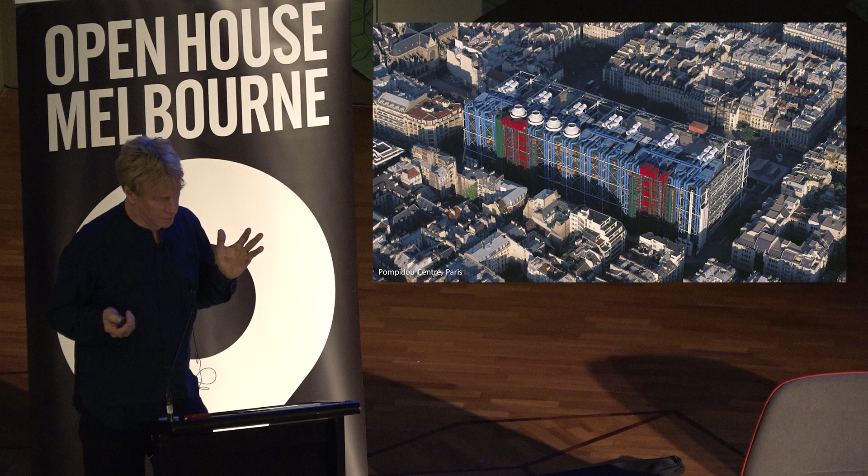This is the founding project of the practice, done in concert with Renzo Piano. I think this building really epitomizes what our practice has been about ever since it was built. It's before my time, so I'm not that old, but it's still as radical today as it was when it was conceived, now 50 years ago.

Richard described it as a place for all people. There was a competition with 600 entries, and it was the only one that gave over half of the city block to a public place, a square. It envisaged really a non-monument, with culture, arts, and a library sort of at its heart - a big flexible container for anything that goes.

The open-ended structure you see here is a scaffolding for the citizen. The piazza is not just horizontal, it's vertical. It's a place both for the formal and informal.

And I think the ad hoc nature of what it is encourages around it an almost showground for the citizens of Paris. It really was a city-defining project in a city that was already very well defined.

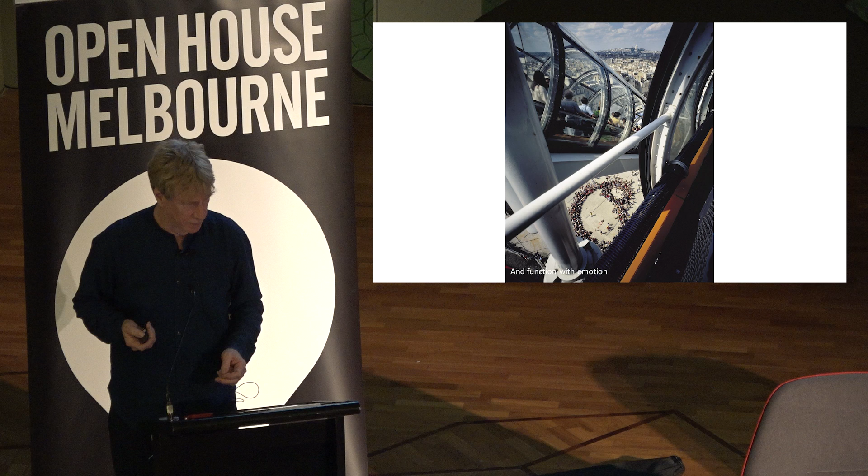The next founding project relates to the city. This was done when I was a young architect, just started at the office. It's called London as It Could Be, a provocative proposal exhibited at the Royal Academy in 1986. This was the foundation of the practice's work on cities, which Richard then took into government, and has been very influential, particularly the concept of a city building upon itself, using brownfield land as the place to build rather than spreading.

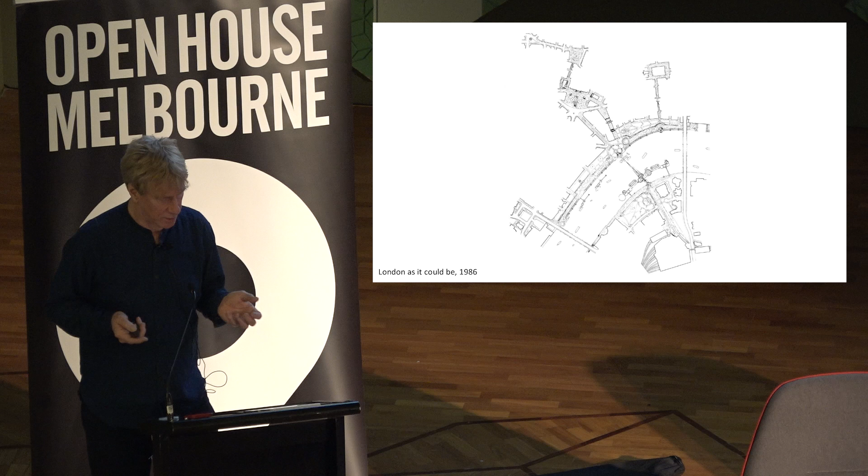It called for the removal of a rail line, which literally crossed from the south, and still does today, landing on the north at Charing Cross. But in doing that, it blights the neighbourhood to the south. So it was really about balancing the city and bringing more equality to it.

It's not a beauty, and I think the idea was to bring back some of that spirit of movement through the city as previously, to really allow people to re-engage with their river.

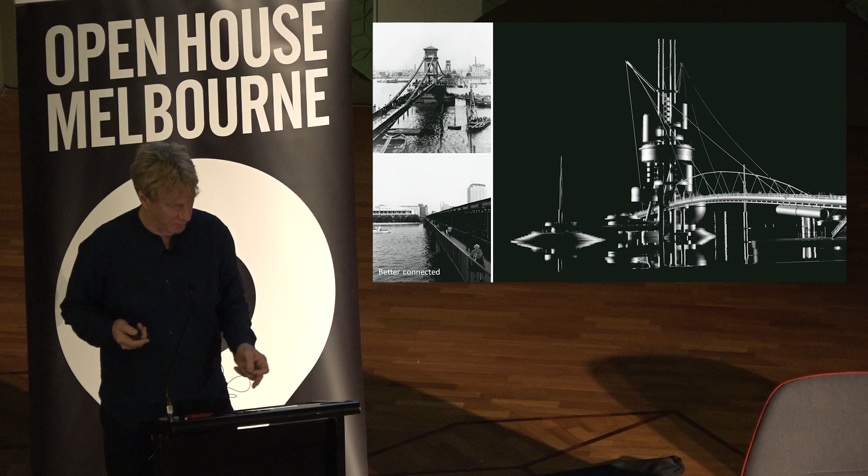It also called for the sinking of an urban motorway, which was actually part of an embankment extended by the Victorians on the river on the north side. That was to rediscover the city's relationship with the water and to make a really great promenade.

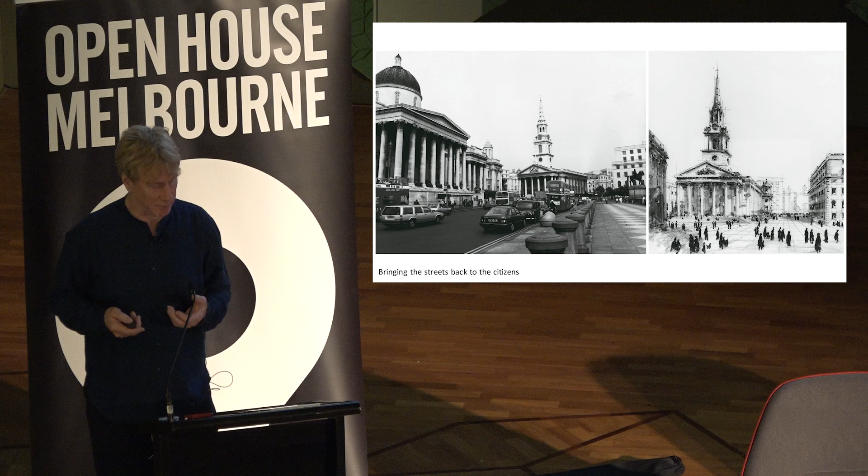It called for change to Trafalgar Square, to take out what was effectively a big roundabout and give that back to the people too. The only thing that came out of this project was that - pedestrianised finally in 2003. So it's step one, there's plenty of time yet.

So I want to run you through a few civic projects that have been certainly part of my career. The first is a law court in Bordeaux, France, which we designed in 1992.

I consider this really my formative work. It was the first time I had an opportunity to express myself, and looking back now, I think it was a real step change in the practice's architecture. It brings the human scale, and is perhaps less overtly mechanistic, but still rigorous with a great integrity about it.

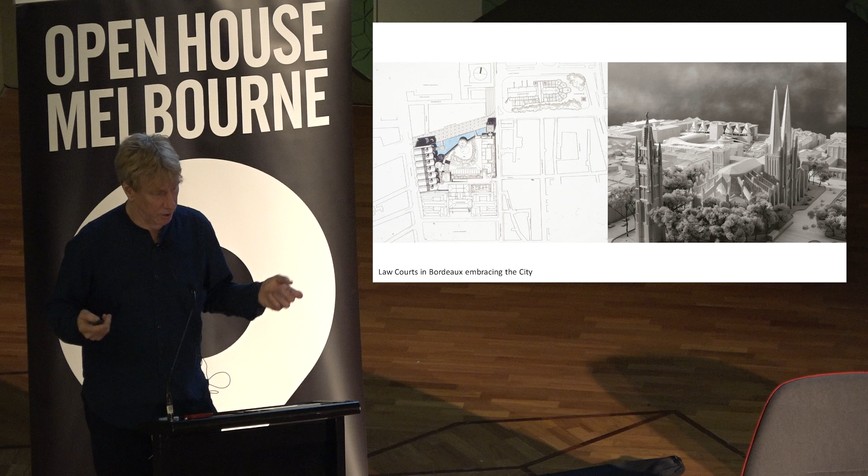About 10 years after we finished the project, the street was pedestrianised, and it has a tram now running along it. The space around the cathedral has the tram running around it - it's for people. At the time we proposed it, they said no chance, this will never happen, but it did.

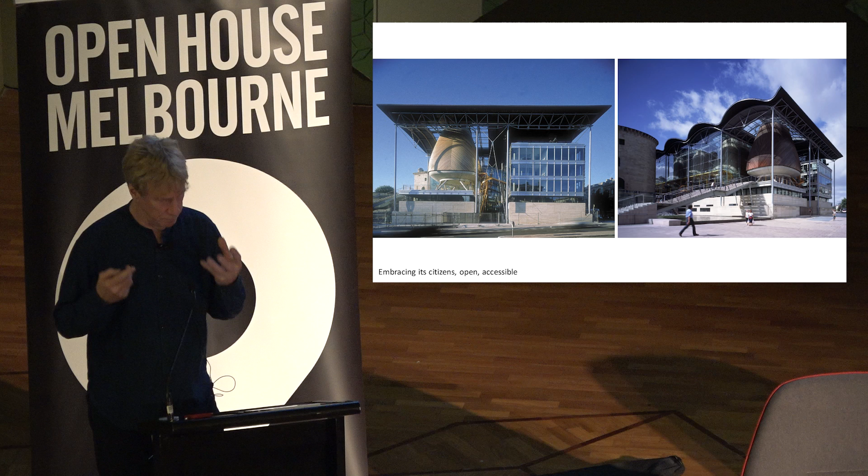The building is very legible in its function. On the left, it's pretty obvious where the hearing rooms are, but it also shows there are other parts to a law court. Most of a law court is office space. It makes the building more approachable, more understandable. No one wants to visit a law court.

So as an architect, what you shouldn't do is make it worse. You can only try to make it better, give people optimism about how they would have to engage with the building that they don't want to be in.

But at the same time, it still has to have a level of formality, a level of civic presence in the city. The site was juxtaposed with a historic tower and wall, a 15th century tower. The site ran around the tower, but we chose just to sit next to it, very close—about 2 meters away at its closest. I've always said that the tower will be standing long after our building has disappeared.

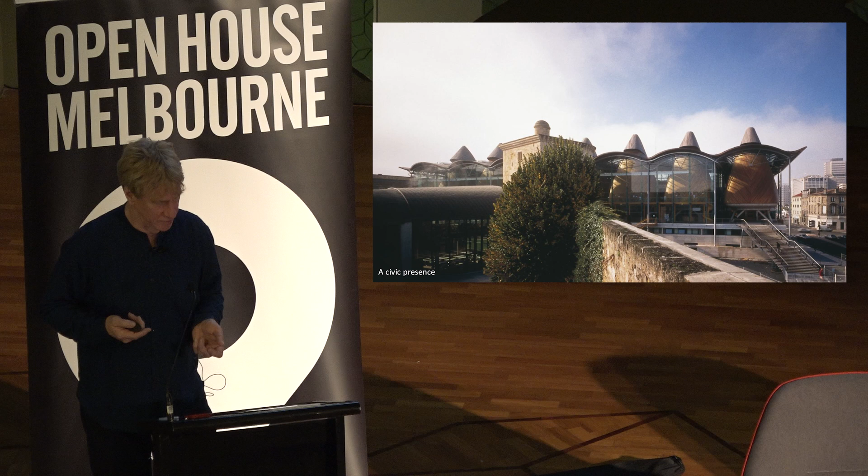But really the aim was to make this civic building something which was more educational than correctional, and something that spoke to and located you very clearly within the city around you.

Following on from the law court in Bordeaux, we picked up a second law court in Antwerp. This was in 1998, but a much bigger scale thing. Really interestingly, this sits, now that it's been built, on the site of a station that was sitting on the edge of the city, the old city wall, which is a ring road—probably the biggest defensive thing of all.

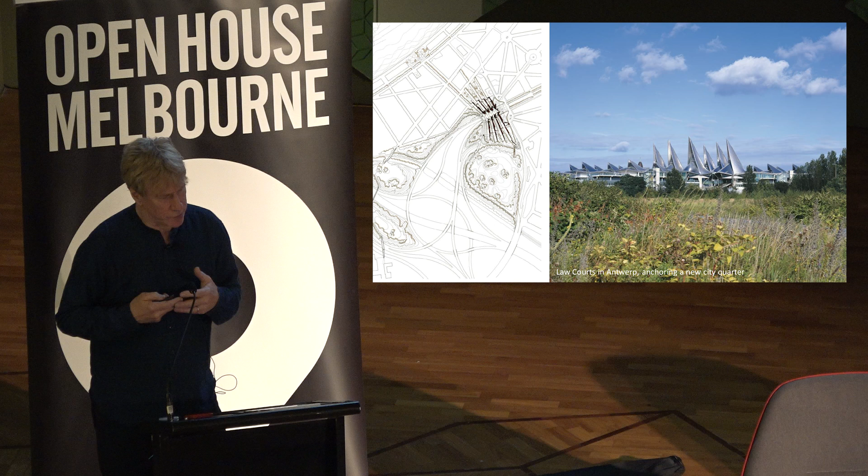It's a sort of ringed city. And of course, the site not only addresses the ring road to one side of the city, there's a road passing underneath the site, and the whole place is heavily defined by this infrastructure that accessed it at that time.

The project was a catalyst also for a new city quarter on the old marshalling yards. On that drawing to the top left, there was a plan that we developed as part of the project, and that plan has now been substantially built out.

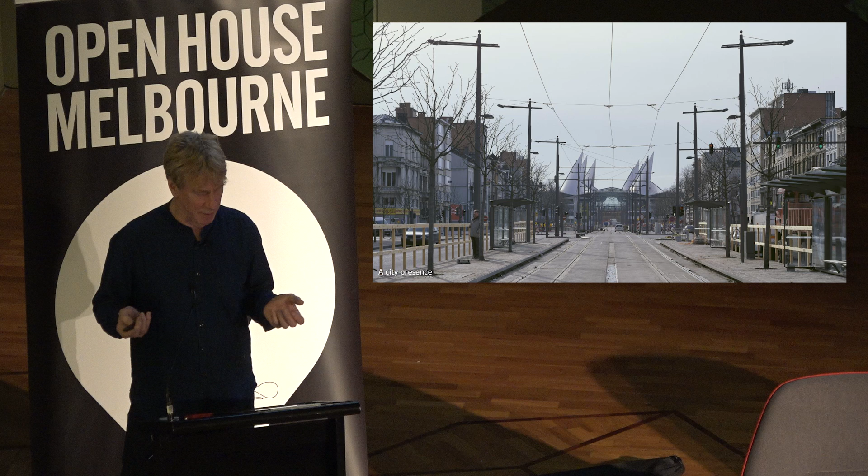As I say, it's heavily defined—the place is heavily defined by the existing road and light rail infrastructure. But our aim, even in that complex environment, was to create a dynamic gateway that would help consolidate the city spaces.

At this distance, the daylight through that main hall is super important to suggest this isn't the end of the city. The city is continuing.

Right at the foot of the building, the trams circulate around and pass underneath the stairs. Law courts, both in France and in Belgium, have to have stairs. It's part of the brief, and it's all about being grand and being civic.

In what's called the salle des pas perdus—literally the room of the lost footsteps, a rather ominous term—the connection back to the city is clear. So the building engages very much with the city, very much with that infrastructure.

And the public rooms, the hearing rooms, all sit across the top of it. That was important too—putting a stressed public that have to visit this building, they don't want to, in a place where they get a moment to look across the city, a calmer place, giving them a panorama, and mitigating this fact that they're in a law court.

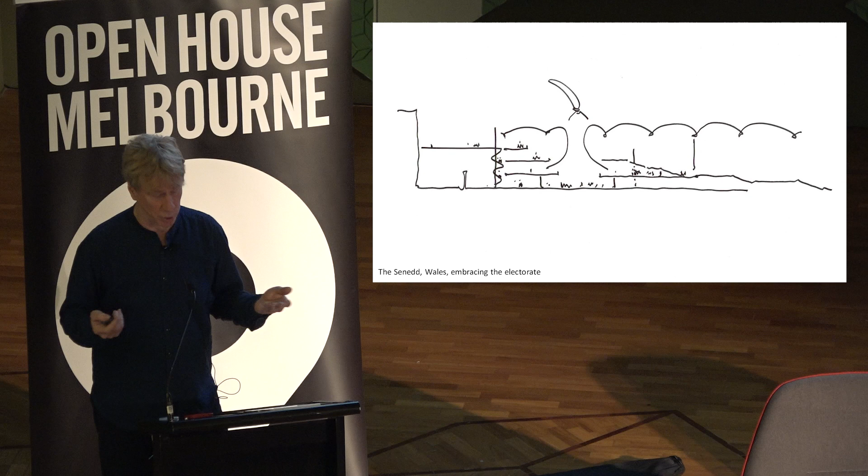The next civic building I want to talk about, a truly civic building, is the Welsh Parliament. This sketch is a sectional sketch, and it describes a relationship between a cover, which keeps the rain out, a public realm which sits across a surface, and then an operating parliament space, a government space, which sits below that. It's about putting the electorate above the elected, not on the other side of a wall, but so that there is a relationship that allows a parliament without doors, effectively, so that democracy can be seen to be done.

It's also an outward-facing building. It engages and embraces passers-by. The building encourages gathering and the attention of the interested and also the uninterested. It's something that really draws you in. And within it, we've really created a living room for the citizens of Wales.

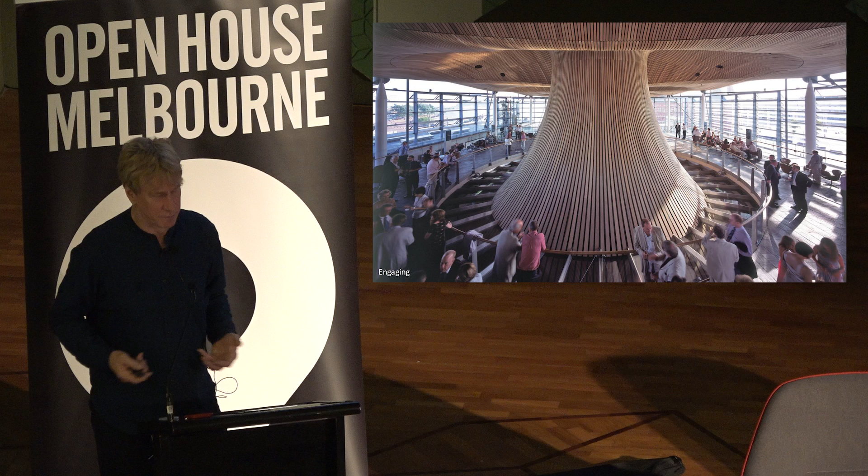You're not guided once you're in that space. Once you're in there, you've been through security, you can do what you want. It has the cheapest coffee, apparently, in the neighbourhood, so it gets lots of people. They have lots of events, but everything's informal in this space, and it's a lovely way that a building that's so important for a state is able to manifest itself on a day-to-day basis.

You can also get little glimpses to the action below, as I was saying, electorate over elected, so you can have a little view of the space below, and this is the debating chamber, where you can sit in a more formal environment, overseeing that more closely and more directly.

This little project here, I say little, it's a big project, is about our thinking in terms of healthcare. This is the first hospital that I've ever worked on, working with many experts to really try and deliver a very different approach to what is a cancer centre.

It's at Guy's Hospital in London. It's on a really tight corner site, so tight we couldn't make the building square. It's a triangle. It's literally half a building block. Not the ideal shape for anything.

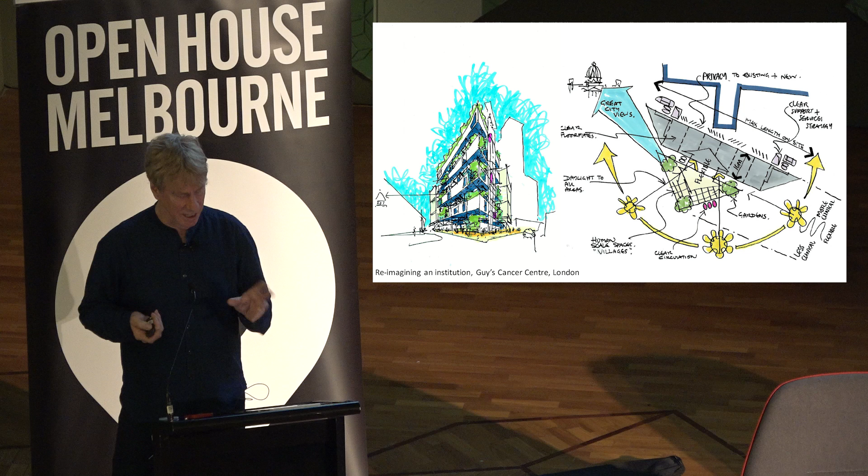The building's basic concept was around creating a very clear distinction between the spaces for the art of care and spaces for the science of treatment. That enabled us to free up the spatial complexity and interest in the places you spend more time, whilst not compromising the spaces that have to do the hard technical work.

Probably the major leap this building made was in a tall building and a hospital where you're confronted with just so much signage, you're anxious, you don't know where you are or if you're there at the right time, etc. The lifts here have 2 buttons if you're a patient or a member of the public, and they don't even indicate what floor you're on. You're either going to one place or another, and it doesn't matter, and that's the important thing.

When you arrive on those floors into what have been called care villages, you're in a world where you're looked after because that's the reason you're there. You're looked after in that specific way. It's all about reducing signage and the anxiety that goes with it.

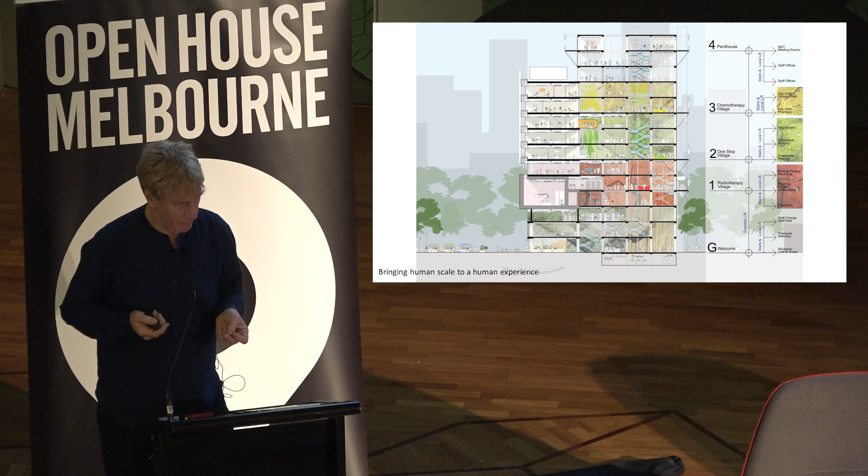So as you arrive in those care villages, they have their own little volumes. They're able to use materials that don't need to comply as closely with the strict requirements of the clinical areas, and it just makes the whole thing a little bit more human. Plus you get access to outdoors, which is super important.

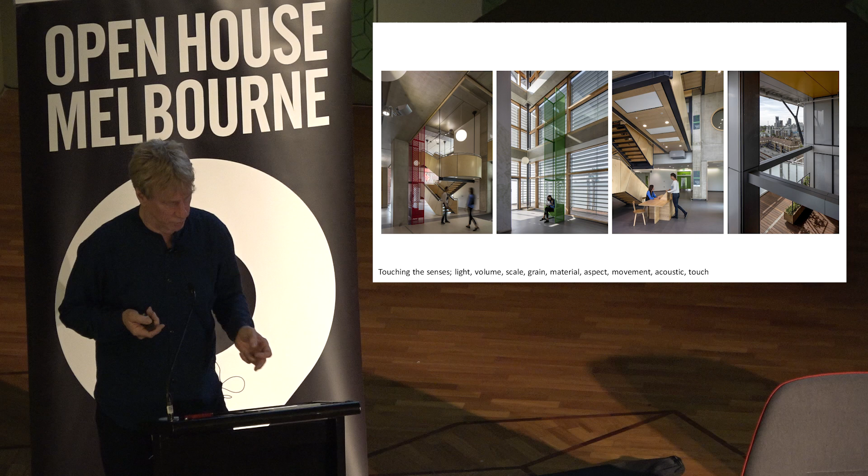So the last of the civic projects I'll show is actually a shopping centre. That must be a civic building these days, but with a difference. So this one is a shopping centre which has repurposed a civic monument, a bull ring.

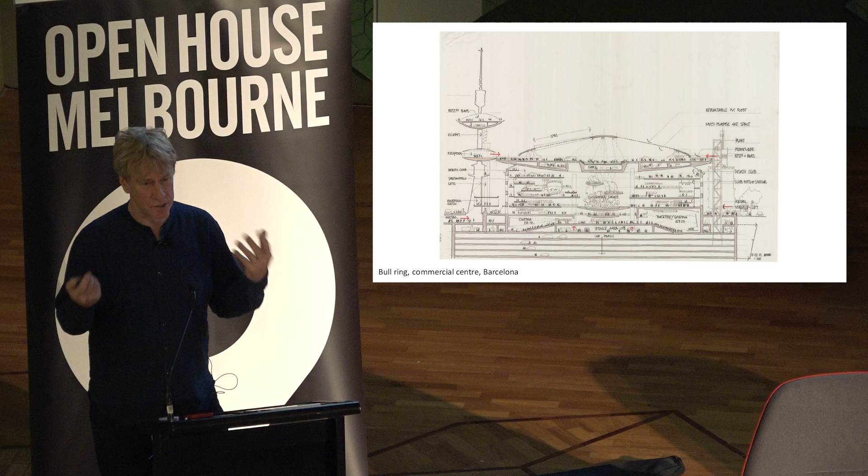In Barcelona, the Catalans gave up being interested in bullfighting years and years ago, so it was surplus to requirements for a long time, but it was a historic remnant of the city. Our repurposing of it, being constrained by that historic envelope, is very important in the project. I think on a square grid, building a circular building you'd have difficulty today, so we took the advantage.

But most importantly, this building, although it's mostly retail, has taken the public space which was the bowl to watch the bullfighting, put it right on the top, and created an amazing overlook across the city with a multi-use space that can be used for events at the centre of it.

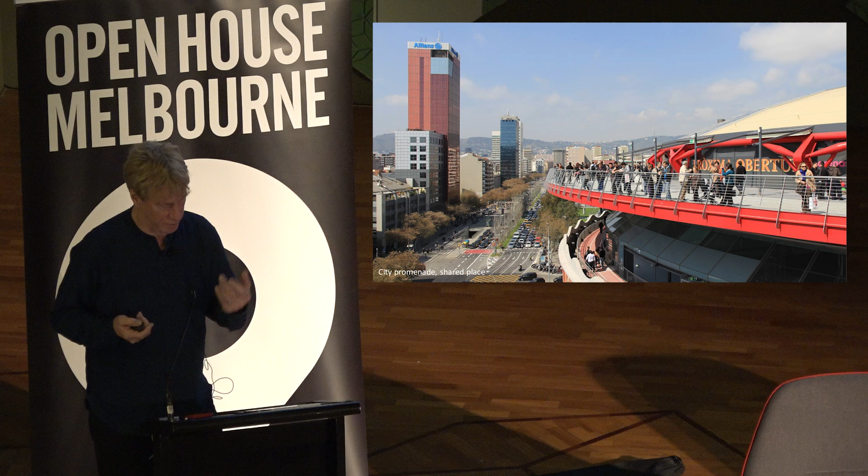At that upper level, there's a promenade that circulates around the perimeter. It's a sort of passeggiata in the evening, lined with restaurants with this venue behind. It's become a must-do destination in the city, both for people living there and for tourists and visitors. Down in the bowels, in that circular form contained by the old bull ring, you still get the shopping centre. Interestingly, for the first time, a shopping centre is actually constrained a little by the architecture. Despite those who know retail always saying architecture gets in the way, here it doesn't, and apparently it still makes a lot of money for them. So everyone's happy.

Going on to the word civil, the one I said is about being polite. I'm picking up some private sector buildings, and the responsibility that all buildings have to engage with the public realm, even in the smallest way, to make it welcoming and have a positive effect on the city around them.

This is a building in Sydney. It was a speculative office tower, so big it covers its entire site. The move we made here was to effectively lose the lower six floors, allowing them to be open and part of an extended public square. The developer gave up a huge amount of potential revenue to create a place that becomes a destination, without controls, that you can just walk through as part of your everyday as a passerby.

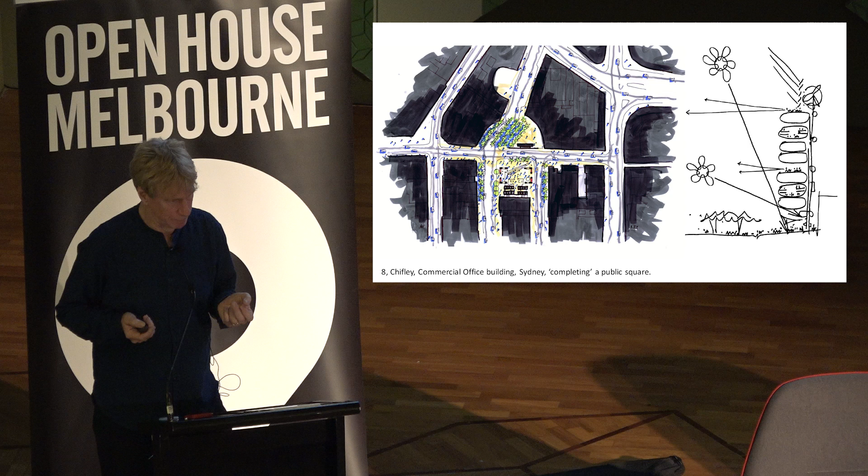And the open lower levels, similar to the Leadenhall building, the Cheese Grater, really create a civic portico, a sort of 21st century portico, which is quite formal, addresses the public square, and importantly brings the scale of the building down to people scale when it touches the ground.

The great advantage of this arrangement facing north is that in the winter the sun comes in, and in the summer it stays out. It's almost the perfect arrangement for ensuring it does the best for passers-by throughout the year, and it sits on a walking route that crosses the site from one station to the heart of the CBD.

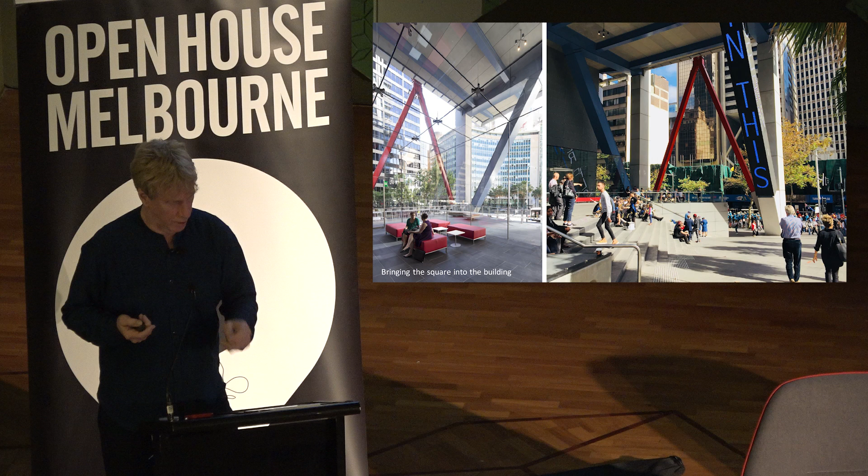But of course, we had to go a little further, being Australia, in celebration of your amazing outdoor culture. We repeated this idea of big outdoor space further up the building, in fact somewhere in the middle and also right at the top. So the tenants in this building almost get their own building to themselves, with the sense that they're standing on another, and they've got their own ground and their own relationship with the great outdoors.

Oh, that is legible, good. Now, you wouldn't have thought this would make the list of civil projects.

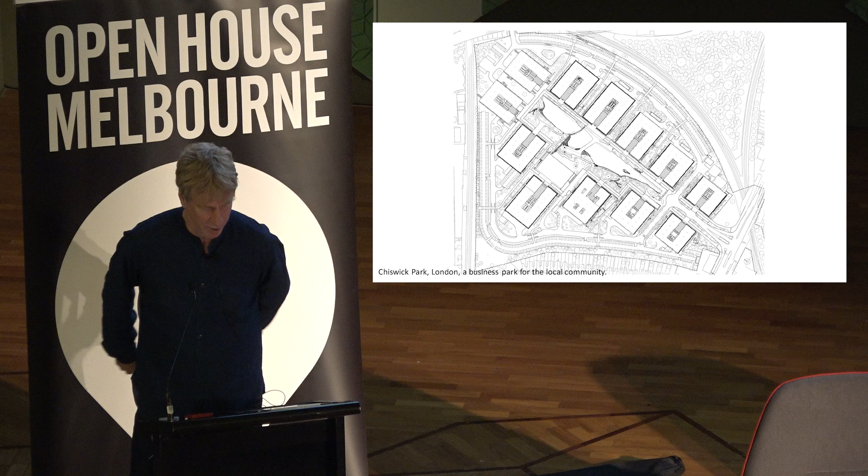This is a business park in West London, the last place really. It's an island, hemmed in by rail tracks running around the top and to the left, with terrace back gardens to the south and the main road on the right. So there's one tiny connection to the road infrastructure, and just next to that, on the other side of the road, is a railway station. So you can get to this place, but it really is an island.

The main move here, which is super important, is that cars were basically banished from the centre of the space and run around the perimeter. They also tuck under the building. It's outer London, or outer central London, so car parking is still permitted here at this time.

The landscape in this place was put in first to establish its credentials, and that landscape has been growing now for almost 20 years. It established the place, and then the buildings were built over 10 years, all using a common language. It evolved over time, discreetly. The logic was not just so we could get all the work, but that the buildings should be background. If the buildings had been fighting to be present, they would have overtaken the landscape as the prime logic behind this plan.

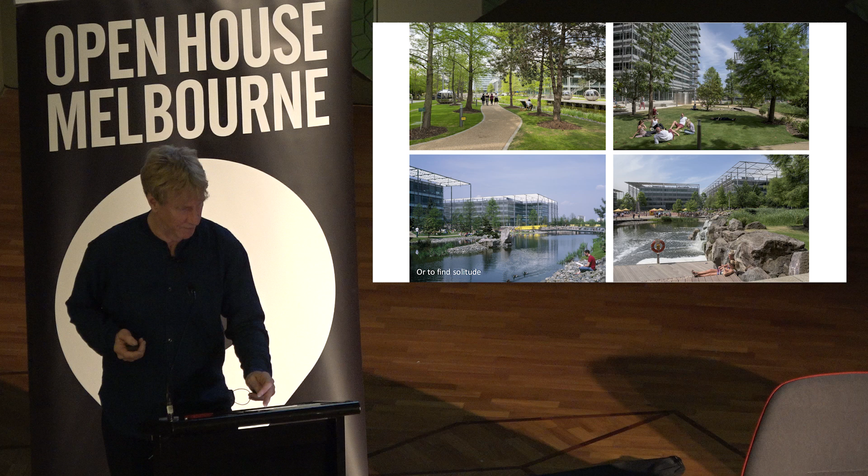And the park's occupied all week long. It's a business park with workers in it, but particularly at the weekend, it's used by the local community. Once the workers have gone, they flood in. Like all parks, it's got places for gathering and places to find solitude. But super unusually, this is a complete piece of private land, so it's the gift of the owner of that land to the community around it.

So this section, I'm talking about the citizen, and buildings that work directly for the citizen - basically transportation. Stuff that fundamentally has to get you from A to B.

This project was mentioned earlier. This is Barajas Airport, Terminal 4 in Madrid. These are the railway stations of the late 20th and 21st century - they're the gateways to our cities. In the case of Barajas, from Europe to South America, it's a gateway to South America. It's the first airport I was involved in, a huge project with great complexity, bringing together not just air travel but also rail, metro, and of course cars.

To make it possible - if any of you know about square meters - there's 1.2 million square meters of construction in this project. We designed it all as a single module, repeated about 500 times across the project. The module was designed to be linked and extended in two directions, so in future - and in fact we're now re-looking at doing that - extending parts of it within the language of the original.

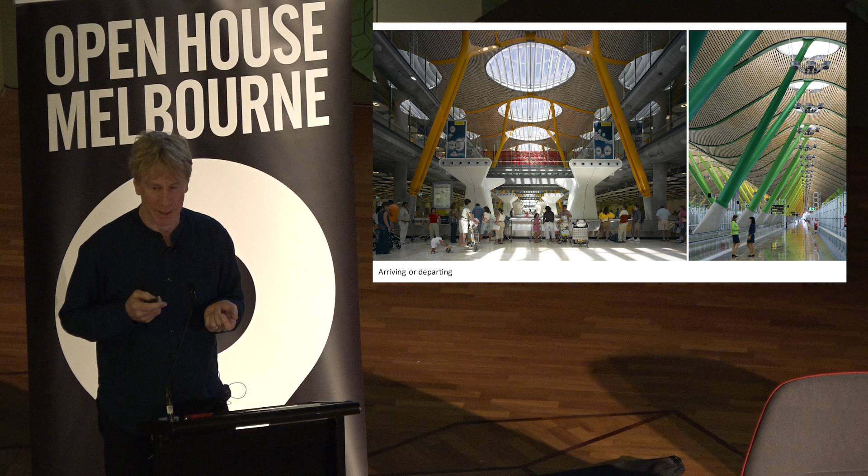Interestingly, the colour was a political choice, not an architectural one. Standing in front of the minister, we made suggestions - could it be red, could it be yellow, or whatever colour? And we were always told, sorry, that belongs to this political party, that political party. We could quickly see we were going to get to black and white. So myself and a colleague, mumbling in the back, said, how about every colour? On the spot, it took a while to think about it, and he said, yep, go for it. That's decision making for you. And of course, it's remembered for its colour, this airport.

The comments were all around concerns about the experience for passengers and for the place, and suggestions to improve that experience. The suggestion was, wouldn't it be great to bring the park to the metro, to bring the light to the metro, and to make the metro space itself more airy, to remove the ceilings that were put in, just give yourself more volume.

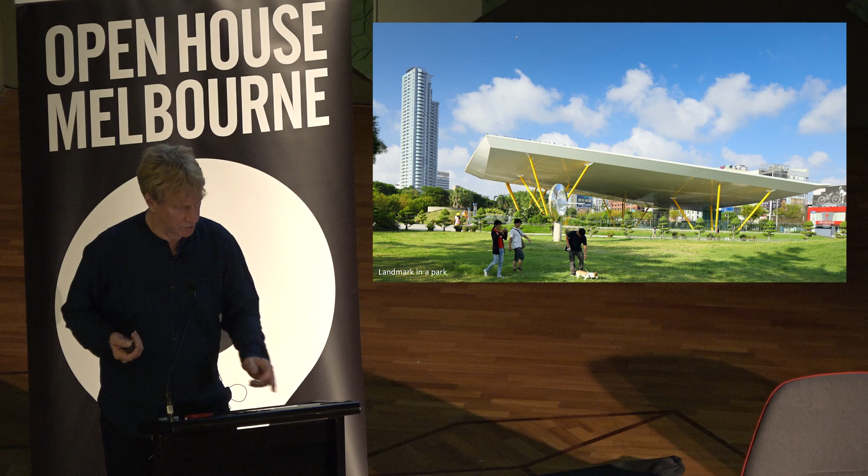So it looks effortless, 60 by 40 meters, made in a number of sections, welded together in the park, lifted up with 4 cranes. It's an extraordinary piece of construction. It's basically a boat, a flat boat, very slender and elegant, as seen from the street. And from the park side, it has a more substantial presence. And of course, the next image, which is really what it's about, is that moment.

It's all about the moment, emerging from metro to something that draws you up to the light. And Ingrid will talk about light in Metro Tunnel here. It's a photo moment, it's the Instagram moment. And it's common, whenever we go here, you'll see couples having their wedding photos taken, like they do in Parliament here. And I understand, although I've never looked, that it's featured amongst the world's top metro experiences. So that's somewhere where we hope Metro Tunnel here will make the grade.

This is a metro station in Naples, and this is where we're bringing the airport together with the metro. So, I won't rub it in, guys, but this airport doesn't have a metro connection, so it's going to get one.

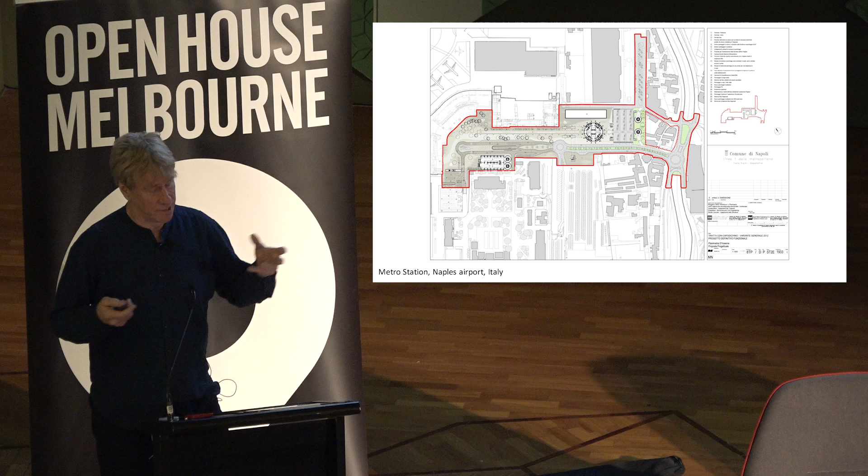And importantly, it was an opportunity to help organise the mess in front of the airport. As we all know, when you arrive into a country through an airport, it's a mess. It's very rare to find an airport that doesn't, I have to say Barajas is an exception. It's very rare to find an airport where you don't just have a mess of stuff to do with cars or what have you. Anyway, so our site is quite a big site, that red line. This is what we're engaged in to try to sort that out for them.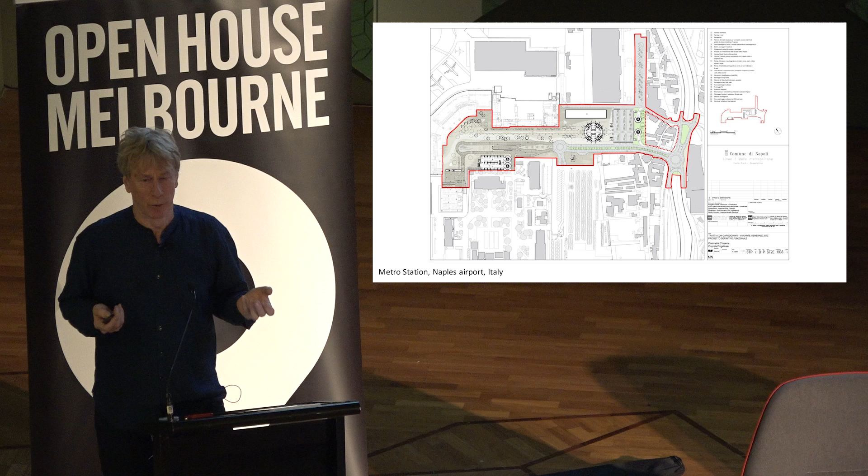But if an airport is a gateway to a city, the metro is certainly the front door. I think in that context, it is more than just a piece of efficient circulation. But of course, it still has to be a piece of efficient circulation. In this instance, the metro is 50 metres below street. I believe Town Hall is 35, and this is a deep metro. This is a really deep metro.

And as part of that, it's really too deep for escalators, considering that many people coming from the airport will have bags. So it's animated with panoramic lifts, still under construction, you can see here. And the yellow spiral, those are escape stairs. So we've basically made a circular hole.

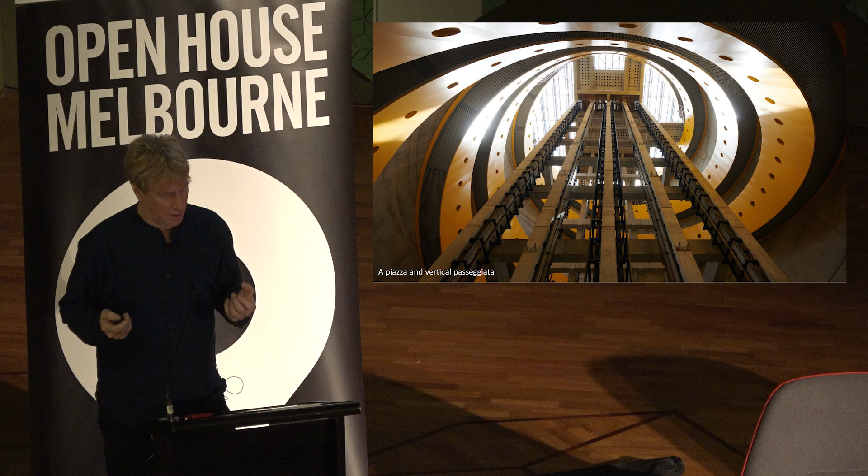It's a good formed circle when you're digging a deep hole, and we spiraled the escape stairs up through that space. At the bottom, we've got a sort of piazza, open to the sky. It's still not finished, it takes a long time to do civil engineering. This one was started before Metro Tunnel. Still not finished. We're hoping next year.

And finally, the city. It brings all these things together, all the things I've been talking about, and the successful cities. So I'm just going to get my... Oh, there we go.

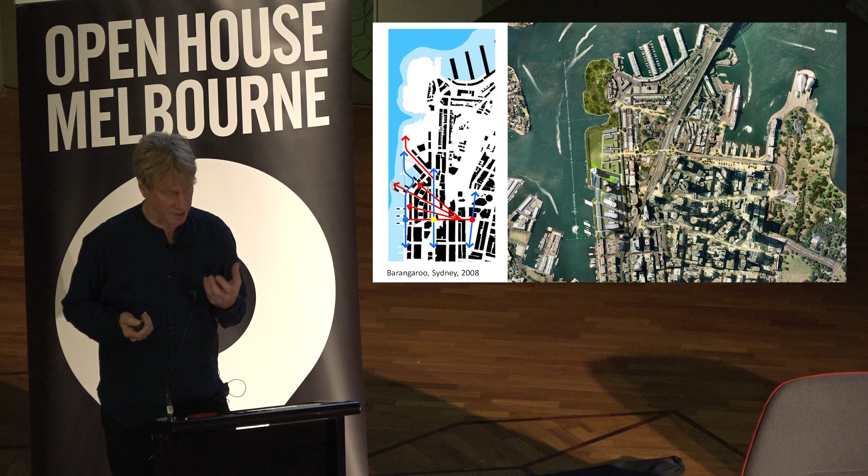So the first one to talk about is Barangaroo South. It's been a huge success. Barangaroo South in Sydney, mixed use, has become a destination for residents, Sydney-siders, visitors, workers, everyone. And that is by the sole fact that it's connected well to the transport infrastructure. It was crucial, and it was a key outcome in the design. So the front door of Wynyard Station, which is of course the station under the centre of City of Sydney, the door of the station through a tunnel was drawn out towards Barangaroo, and a sign put on the end saying Wynyard. And so the station has been brought to the doorstep.

Psychologically, you're right there. On the water side, the ferry, it's taken pressure off Circular Quay. It's brought the ferry, a lot of the ferries from the west come here now. And then between it sits Barangaroo South. Fine street grain, you'll recognise that here in Melbourne, in the laneways. Built for people, definitely not for cars. And it really has successfully turned a backyard into a new front door.

And in the process, we did the master plan and we did 3 commercial towers, a financial engine really that enabled the city to construct a significant public headland, and then eventually a public park, which will total together about 50% of the precinct for the citizens of Sydney, the Sydney-siders.

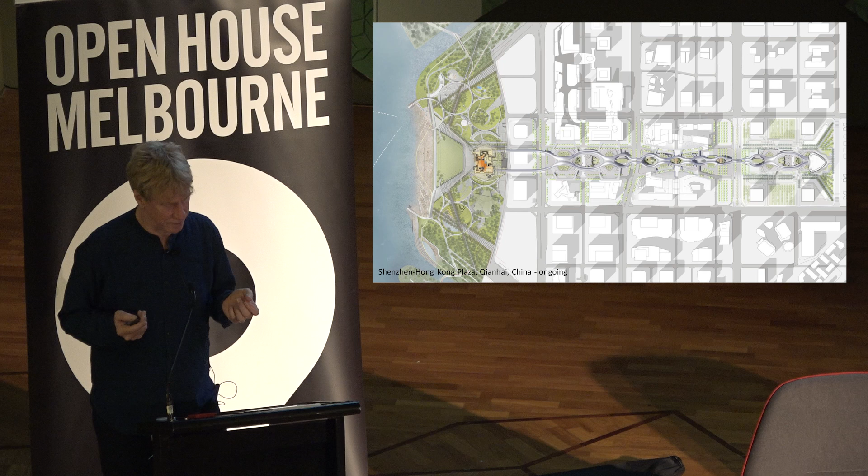On the other end of the scale, a very different challenge here in Shenzhen, southern China - this is a project that's ongoing. This is a city built rapidly from scratch over the last two decades, still massively under construction, and inevitably lacks the fine grain of a city that's evolved over time. This project has been designed to create a form of urban living room, whilst also creating an interchange between four different underground stations, including a fast train to and from Hong Kong.

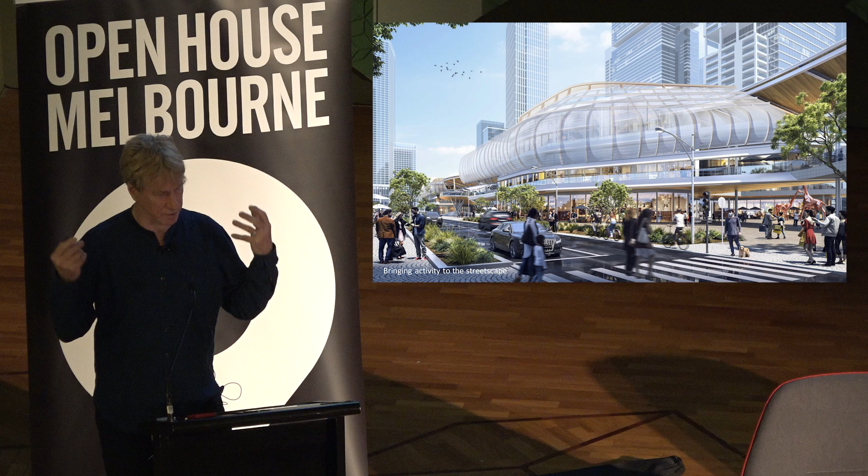It's about 1.2 kilometres long, and it will bring a much-needed piece of contiguous open space in the heart of the city that connects to a seaside parkland. It mediates between a number of levels, above ground and below, and the form of it is all about creating gathering and event spaces along that route. It aims to humanise the streetscape, setting itself as a foreground against the massive scale of the towers under construction in the background.

So the final project I want to talk about, which I think is very pertinent, is a project in Florence, on the outskirts of Florence. It's quite a modest project by scale, but a really important one for this - what was, and still is, a suburb on the outskirts of Florence. It acts as a catalyst for positive change in the existing communities.

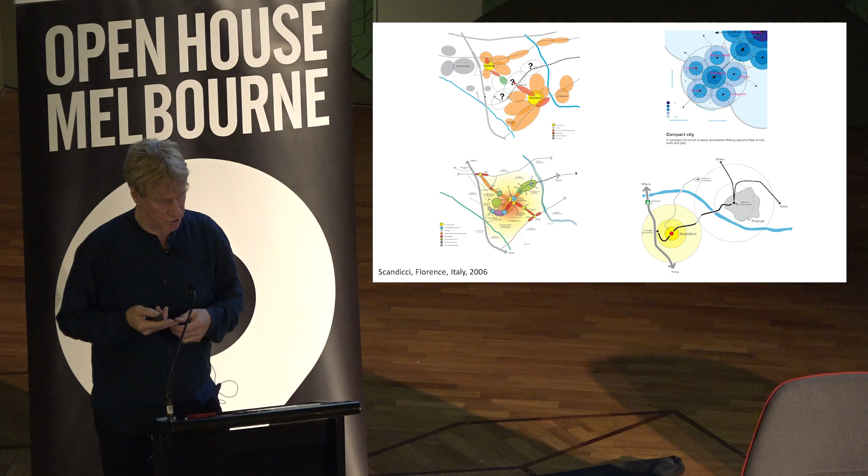On the bottom right, this was a plan to put in a light rail link from the suburbs to the centre of the city, because of congestion, particularly tourist congestion, and eventually this link goes out to a park and ride through some of these suburbs. The top right is a diagram from one of our cities books, about how we think cities should be - polycentric, not one focus with suburbs as dormitories on the outside. This town was currently seen as a dormitory - if you lived in Scandicci, you would say, 'I live in the outskirts of Florence.'

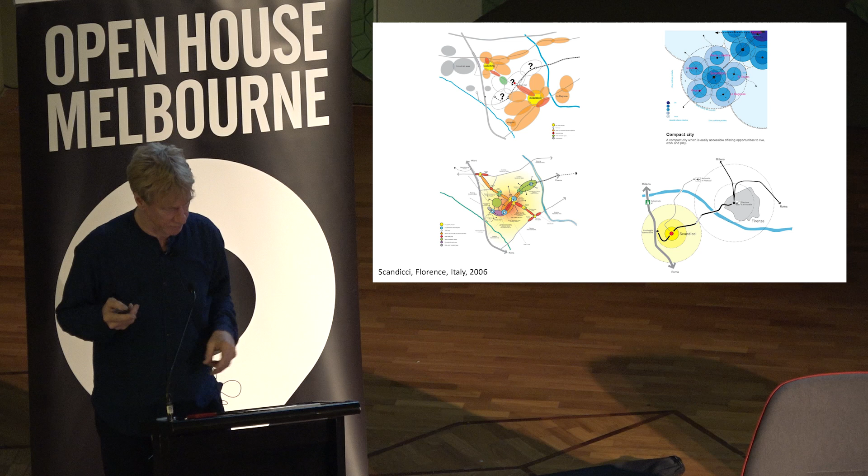To the top left is the available space - you can see there are two communities, and between them there's a space. That's the space where they run the light rail, because it's open space. Our master plan drawing on the bottom left asks what the opportunities are in bringing this through to unite those communities and create a critical mass, perhaps creating another centre - the idea of this polycentric city. That same little diagram overlaid on an aerial was describing that unity, and it became the official emblem and graphic for the project, quite interestingly.

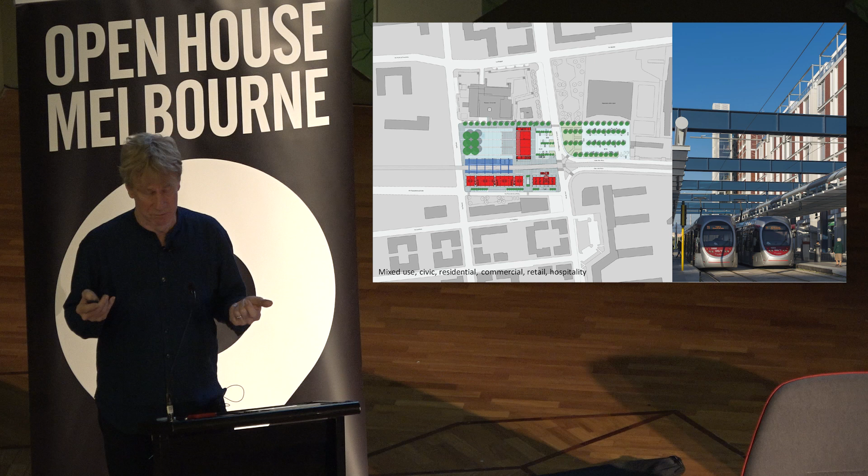But the plan for the first phase, to really get this place going, is very simple. It just places three buildings - a cultural building with flexible space, a small office building on the right, and a bigger residential building with retail and a tram stop. But then, really importantly, between those, facing up the page to the north, a piazza.

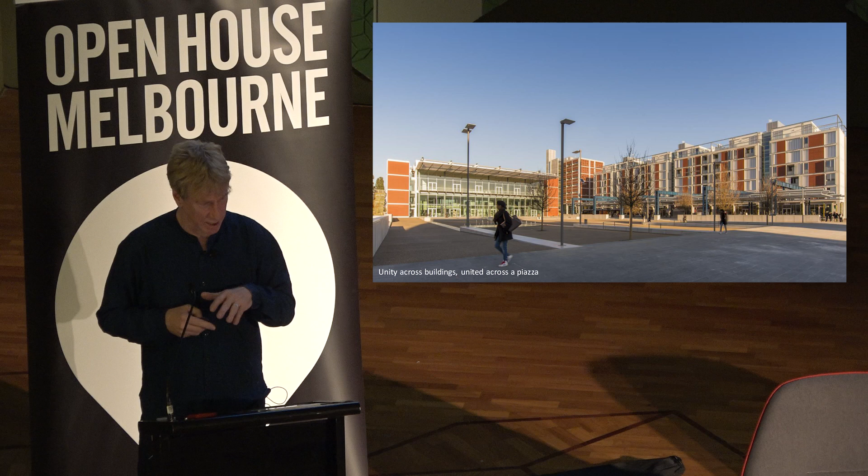Of course, this is Italy, we've got to have a piazza. And as at Chiswick Park, the focus is on the gathering space - the importance of the piazza is reinforced by adopting one language for the buildings. So it begins again - the buildings not dominating, allowing the space to dominate. The piazza is now occupied by people living in Scandicci. When you ask them now, where are you from, they say, 'I'm from Scandicci' - not 'the dormitory town' or 'the suburbs of Florence.' It's given them pride in their place.

We'd really like Metro Tunnel to bring all those aspects to Melbourne. It's going to add new points of focus to the Hoddle grid. It'll arrive at the city in a different way, be perceived differently, not through the streets on the tram network, and I think that'll undoubtedly change the way the city is perceived in a positive way.

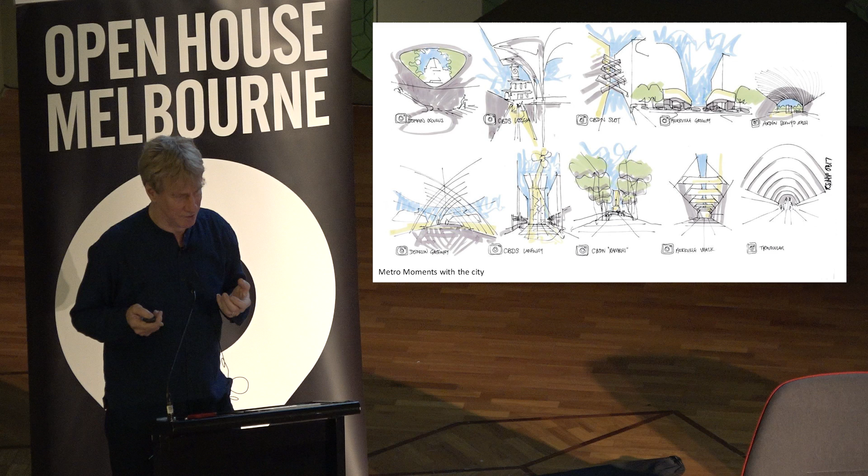This was a series of sketches done back in 2017, which were described as moments - Instagram moments. So it's of the moment, and probably isn't anymore - it's probably TikTok now - but whatever it is, it's making a record, saying this is a moment that I capture and it's part of my experience.

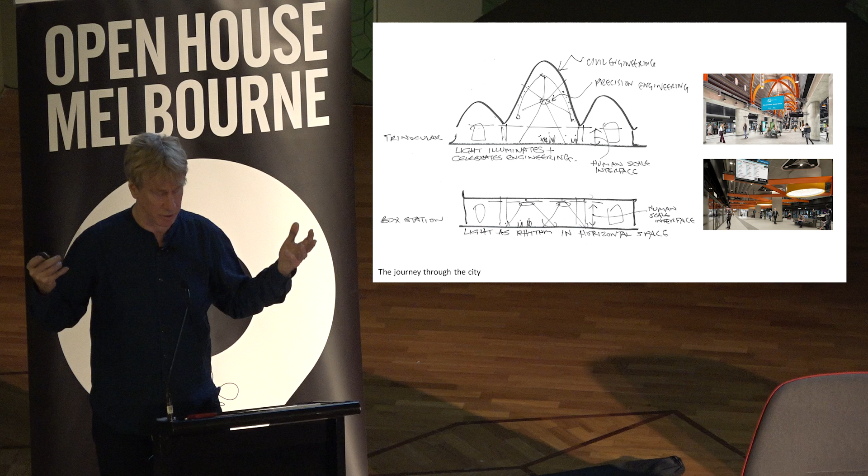Within the stations themselves, that experience is going to be fast and efficient, but also uplifting and very human. I was on this station's platform yesterday, and these are grand spaces, but they have an intimacy about them. That intimacy is created by setting off this extraordinary piece of civil engineering against what we call precision engineering, components all made by craftspeople local to Melbourne. So it's very much made by you guys for your metro.

And those special moments that occur at each portal, the one thing they have in common is they're all about rising from below and addressing the city above. And that's the end of my piece, so I'll be handing to Ingrid, who will then explain all of the detail.

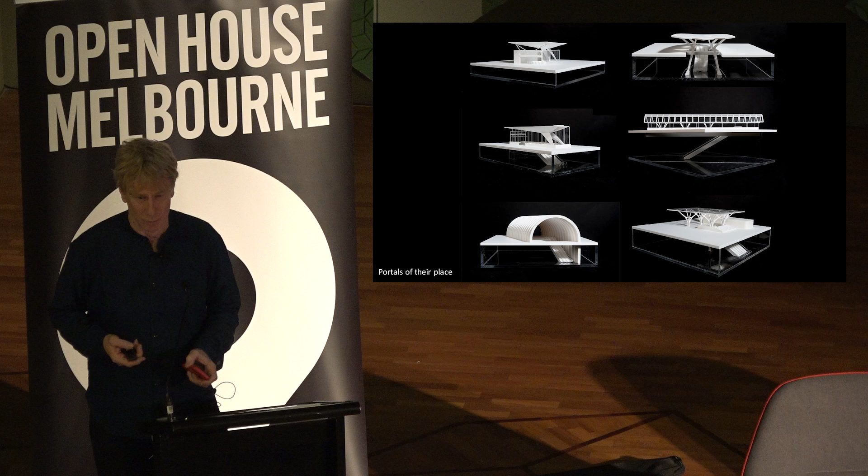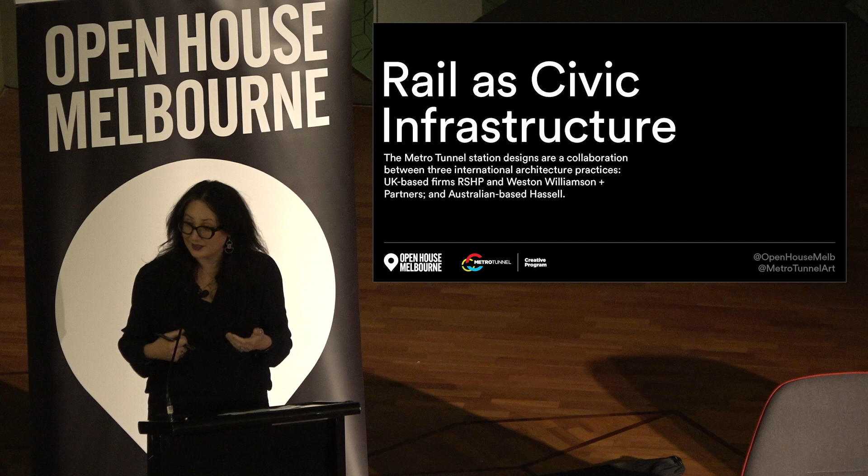Thank you, Ivan. That was a really wonderful introduction, I think, to RSHP's work, and also an understanding of the relationship we're trying to build in terms of city making with the civic realm. You can really see the key takeaway is that the civic engages the city. And I think what Ingrid's going to show us now is how the civic engages the city a little bit more. So I'd like to introduce Ingrid first.

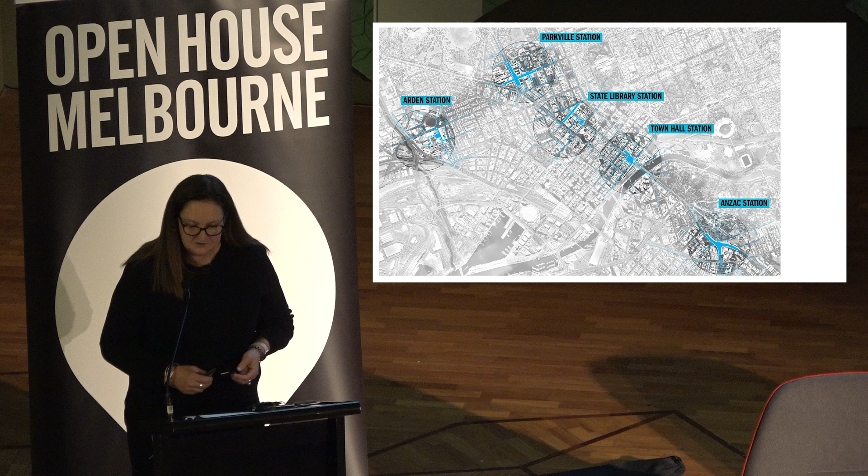The station entrances above the ground are designed to fit within the context of the part of the city that they're in. One of the ways we've done this is through materiality. Anzac Station has timber that relates to the natural environment it sits in. Arden has brick, which speaks to the industrial heritage of that place. Parkville has a tree canopy that adds to the new boulevard along Grattan Street. Town Hall has stone relating to the beautiful heritage buildings around it, the cathedral and the Town Hall building itself. And State Library, here where we are now, has concrete reflecting this really urban environment.

I'm going to run you through all 5 stations, starting from the north and going to the south. Quite high level, but we'll see how we go.

Arden is a catalyst for a whole new precinct. It's going to be the first building, or it is the first building as it's already finished, in what will be a whole new development for this north part of the city. The brick arches through the entrance tie into the industrial heritage of its location.

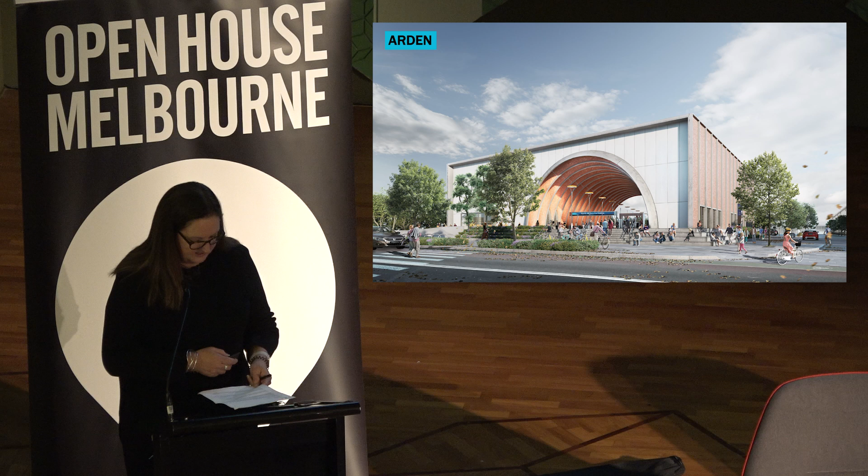Arden is what they call a cut and cover station, meaning the box of the station is constructed from above. Parkville and Anzac are also cut and cover, whereas the two CBD stations, being so deep, are mined using tunnel mining machines. Just a bit of technology there for you.

Here we're a bit deeper into the entry of the station, and you can really start to see the detail of the brick arches.

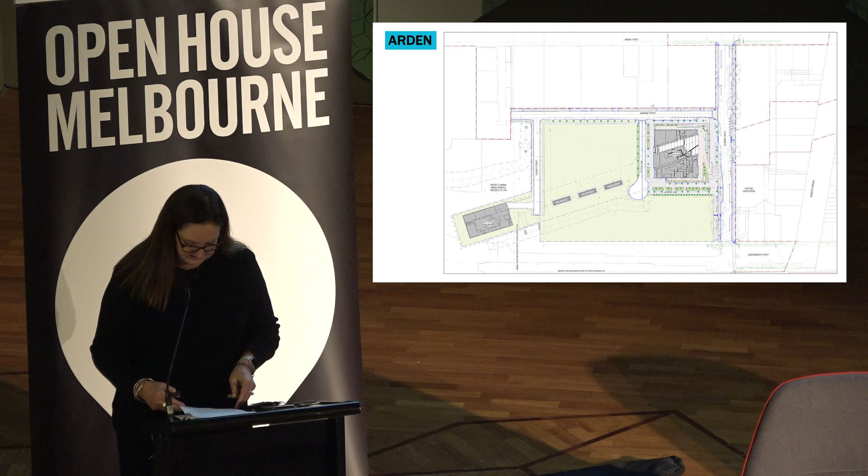This plan shows where the station is located in the Arden precinct. The entry is on the right-hand side of the image on Laurens Street, just down from Arden Street to the north. It also shows the extent of landscaping designed to deal with flooding in this part of the city. The station itself is built on a plinth, again to keep it safe from flooding.

Now we'll move to Parkville Station. Parkville is a real connector, sitting in the heart of one of the best education and medical precincts in the world. It's creating a new front door for Melbourne Uni and connecting it with the whole medical precinct, making it much easier for people to get to.

The station itself sits under Grattan Street, and here you can see the very long skylight built into the enhanced pedestrian zone on the north side of Grattan Street. Here's a section cutting through down to the station level, showing how light pours in from the skylight all the way down to the platform level.

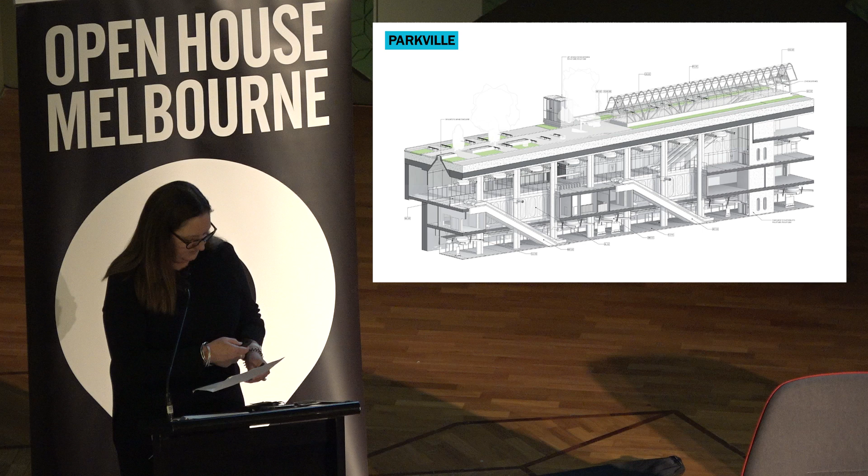This is the main entry off Grattan Street at one end of the large skylight. Here you can see the concourse below the skylight, acting as a kind of street beneath the street, with a whole lot of retail, food and beverage, a great amenity particularly for university students but also for the wider medical precinct.

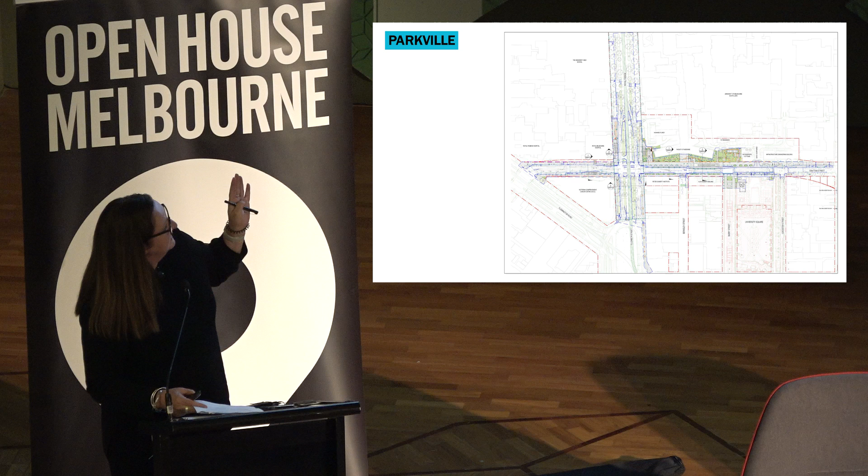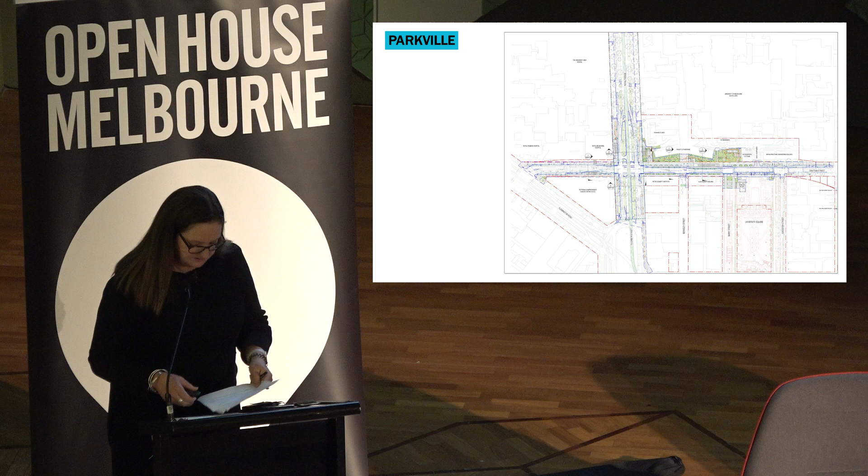You can see in plan its relationship to Grattan Street running through, and Royal Parade running north-south. All the stations have multiple entries, and this will make it much easier because people on the hospital side can enter the station on the left-hand side of Royal Parade and go underneath rather than crossing the road. That's another shot just showing those skylights.

Now we'll move to State Library, which is right below where we are now. It's going to provide access to RMIT and the whole shopping precinct. The entry is made up of large concrete portals that again allow natural light as deep into the station as possible. This one's probably the trickiest to get natural light into because of its really urban environment.

But this station connects underground through to Melbourne Central Station, allowing people to transfer between the stations without leaving the ticketed area.

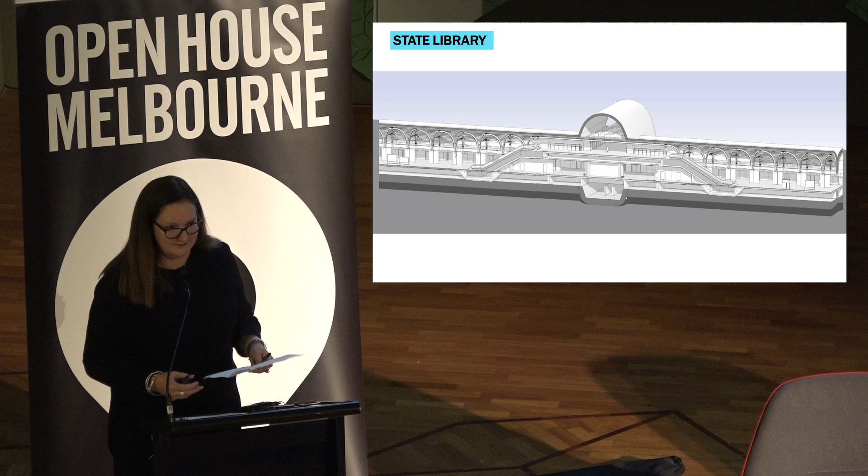Again, here you can see a section through, down at the platform level, showing that double-height vaulted space that Ivan showed earlier, showing just that generosity of space. It's actually quite breathtaking when you're down there, almost cathedral kind of scale.

This plan shows its relationship in the city. You've got Swanston Street running north-south, La Trobe Street on the bottom, so the main entry building is on that corner. But you've also got entries up at Franklin Street, and there's a whole new pedestrian area at A'Beckett Street as well. This shows some of the landscape and the ancillary buildings along Franklin Street.

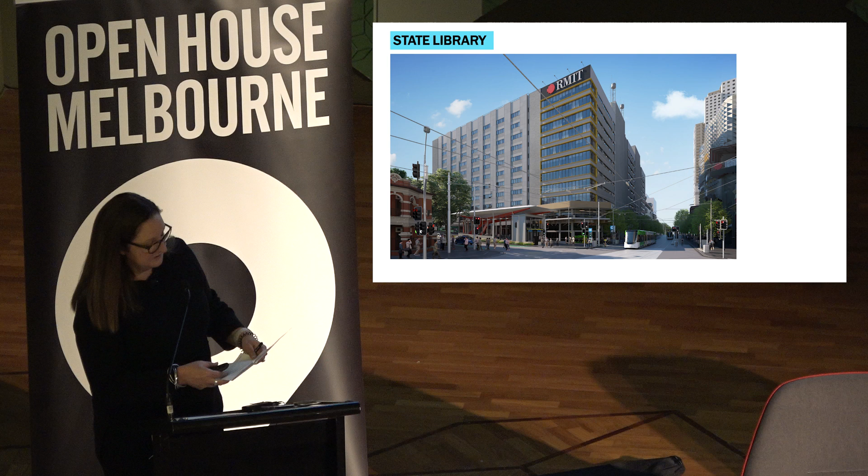And then at A'Beckett Street, a whole new pedestrianised zone. At the other end, you can see how easy it'll be for RMIT students in particular to access the other entry at the north end of the station. There's also an overstation development above the main entry on the corner of Swanston Street and La Trobe Street, a mixed-use development with some commercial and student housing.

Now we'll move to Town Hall. Town Hall is really going to create a new civic heart for the city, providing a great new meeting place in the enhanced City Square.

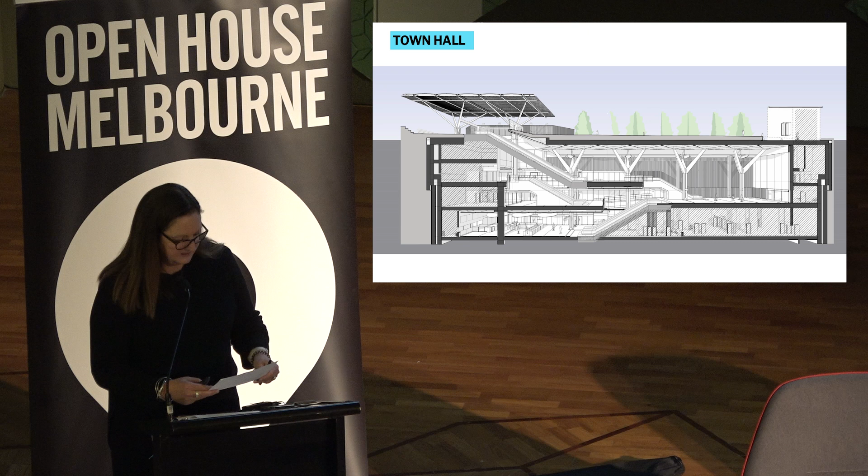This section shows you the space underneath the City Square. It's been nicknamed the crypt space, a huge triple-height, or maybe quadruple-height, space that will be able to be enjoyed by the public.

A really lovely story is that Town Hall station connects underground to Flinders Street Station via the beautiful heritage Campbell Arcade. The arcade previously couldn't be accessed by people in wheelchairs, and it's actually been closed for many years, so now it's going to be accessible to all, and it's just a really beautiful space.

Town Hall also has an overstation development that you can see here. It's a new mixed-use development with 2,000 square metres of retail on the ground and 16,500 square metres of new office space above. It also connects into Flinders Lane behind the old Nicholas building.

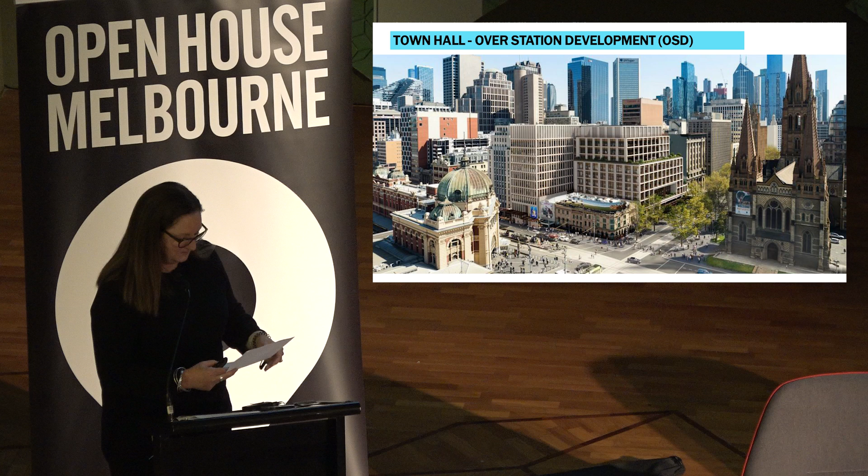Adding a whole new kind of public realm and laneway connection. Last but not least, we've got Anzac Station. It's a pavilion in the park, a multimodal transport interchange connecting the train and tram network. It'll provide great access to the Shrine, the Botanic Gardens and Albert Park Lake via a new public realm in the Albert Road Reserve.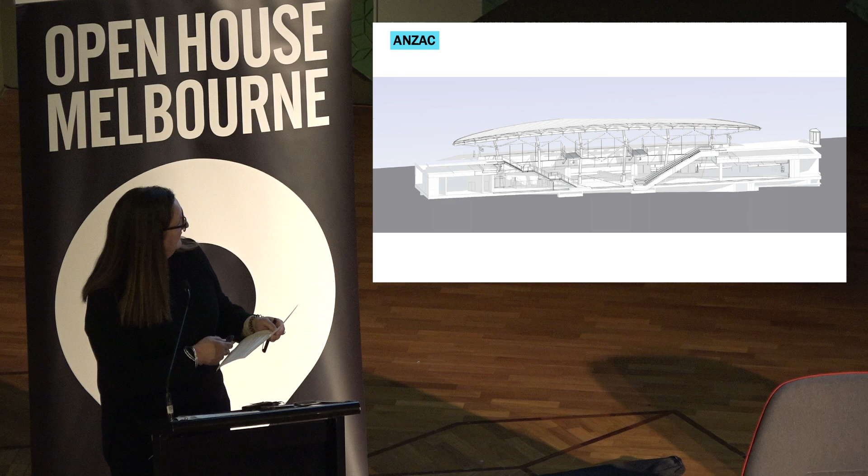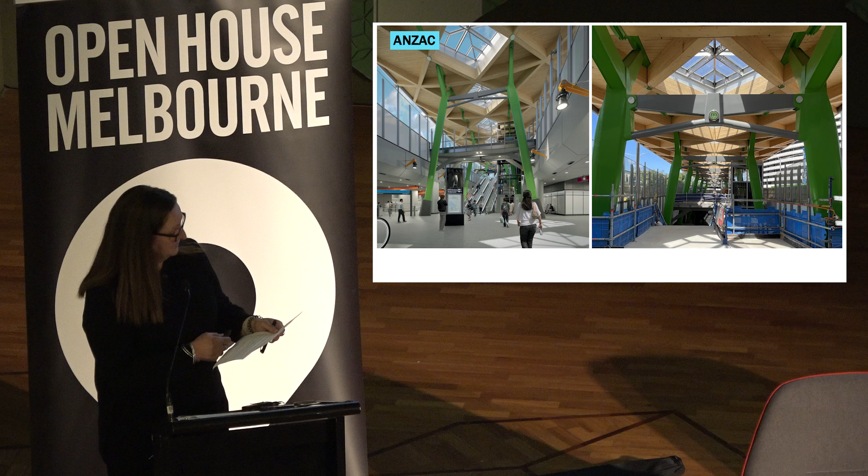Here's some actual photos, particularly the one on the right - a render on the left and a real photo on the right. You can see the beautiful diamond-shaped skylights, again letting in a huge amount of natural light whilst keeping everyone protected from the rain.

The station entrance sits between the tram lines like an island on St Kilda Road, allowing passengers to transfer from the train to the tram and vice versa, again without having to cross the road. And you can see here the really wide tram platforms.

This is designed to really deal with some of those large crowd events that often happen in this part of town, like big Anzac Day marches or the Grand Prix.

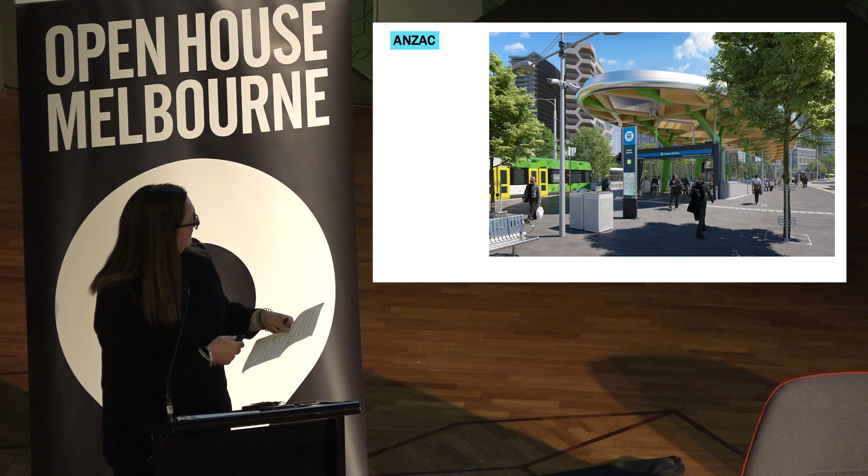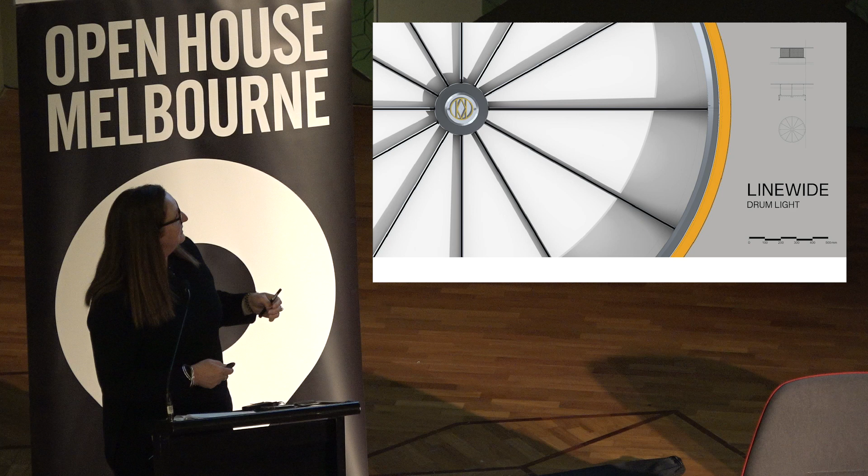As I said earlier, all of the stations have their own identity on the ground, but there's a really consistent language that runs through all of the stations. These are beautiful drawings of one of the light fittings, one of the drum lights - huge light fittings, but really beautiful. We've also got a series of ceiling ribs that tie all of the stations together in a language of different relationships, helping with wayfinding and orientation, giving this consistent language.

We call these the shark teeth - a ceiling baffle that helps with acoustics, often in the transit spaces between the platforms, which we call the adits. But we'll give you more detail on that as we get closer to opening, I feel.

Now I'm going to show you a little video. I hope this works. This is some drone footage taken just recently of Anzac Station.

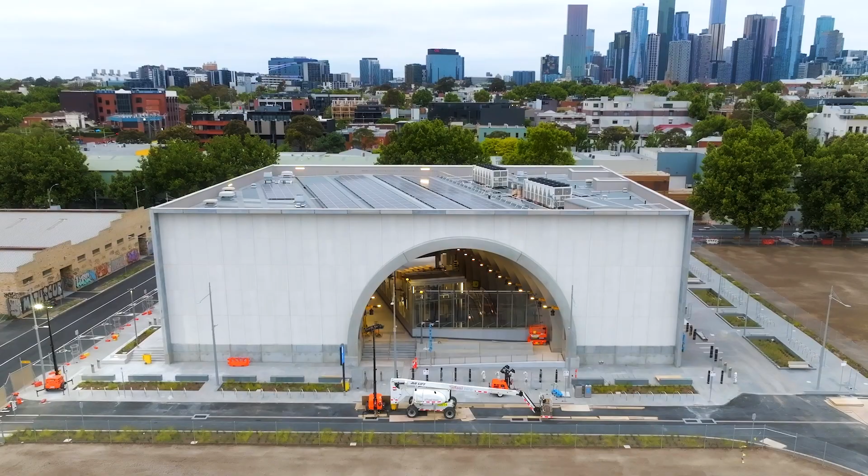I think you can see from that footage what a wonderful collaboration this project has been. Just before I sit down, I'm going to introduce Jill.

Jill is the Victorian Government Architect, and she's got over 40 years' experience across practice and government in Victoria. In 2015, she became the first woman Victorian Government Architect, and she leads the expert OVGA team. In her role at the Office of the Victorian Government Architect, she's an advisor and advocate for exemplary design. She chairs the Victorian Design Review Panel, advises on a diverse range of government competition processes, reviews a wide cross-section of government and private sector projects, and has an outward-facing role engaging regularly with industry, universities, state and local government bodies, and with the broader public, like today. As a passionate advocate for architecture and design in government, and a commitment to building legacy for our community, Jill promotes the value of contextual, integrated design thinking and a collaborative approach across design disciplines. Welcome, Jill.

In many ways, the stations could have been simple and efficient and effective, but we can see that they've got much larger aspirations, and I'd wonder if you'd talk about the government's aspirations for these stations and the Metro Tunnel project as a whole.